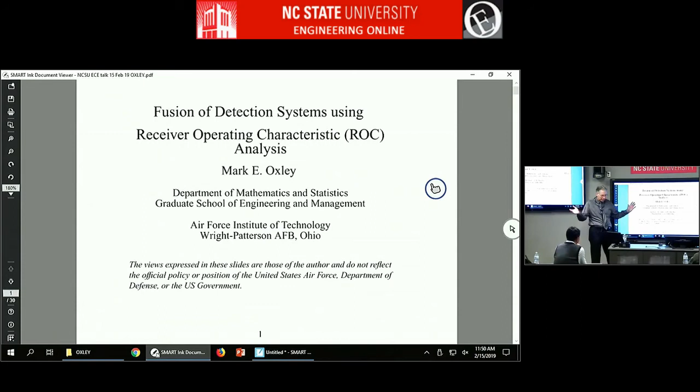So anyway, all right. So if I remember right, I just press the down button. Yeah. By the way, I point out this statement here. I don't represent the government, but they pay me anyway, so I guess.

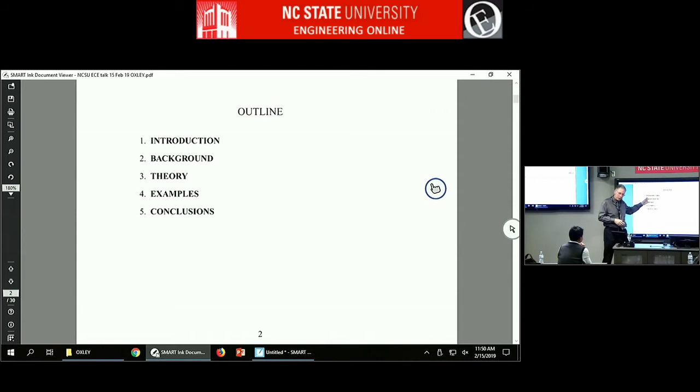So my outline, I'm going to try to do this. One of the things you learn in the Air Force is how you're supposed to give talks. You know, you're supposed to tell them what you're going to tell them, and then tell them, and then you're supposed to tell them what you just told them. I think I'm just going to do the first two. This is what I'm going to try to tell you, then I'll tell you. So to start out with some introduction.

So what's the motivation for this research? So the Air Force has a lot of legacy systems, detection systems. Not only does the Air Force have detection systems, but you're seeing detectors all around cities and things like that. So improving the detections of those detection systems is one of the things we want to do. But since I work for the Air Force, I'm focused on Air Force problems. And so we have a lot of legacy detection systems. So, okay, some improvements have come, so we should try to make that detector better.

So what are the things we can do to make the detection system better? Well, we could upgrade the sensor. Maybe the sensor has more pixels or whatever the sensor is. We could go in and change the algorithm because maybe there's a better algorithm. Maybe we can insert another sensor alongside the original sensor. So now we've got two sensors. Maybe the second sensor is a little bit different. Maybe it has a different modality. Or maybe we can just insert a whole new component along with the original components. Maybe that would get better performance. So that's one of the things we can do with legacy systems.

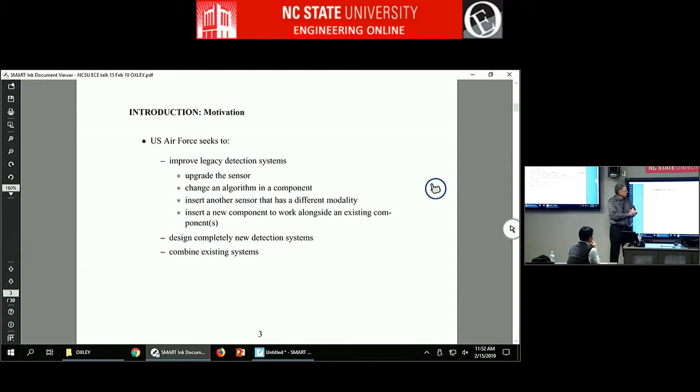Or maybe we'll just scrap it and start all over with a whole new design. Or maybe we can just take the legacy system as it is and take a new design and then combine them. So there's a bunch of options here. Okay, so, but making these changes to existing systems and not knowing, if I combine something or pull out an algorithm and stick in a new algorithm I think is better, it'd be nice to know what the end result is. Doing all that actually costs a lot of time and money.

If you want to put a new sensor on an aircraft and then fly it, you've got to make it, test it, you've got to do all these things. You've got to design it, especially if you're going to combine it with another one. And there may be a bunch of different ways that you can combine it. You've got to build this new combined system. You've got to test it. You've got to maybe take it out to Edwards Air Force Base, put it on an aircraft, fly it, test it. That's going to be very expensive.

Plus you've got to wait in line to get some test pilot in an aircraft to fly it on, and it's going to be very expensive. And then you've got to perform a verification and validation on the system. Maybe you do that before you even test it, but you get test data now, you're going to try to verify it. And then you've got to determine the performance of the new combined system.

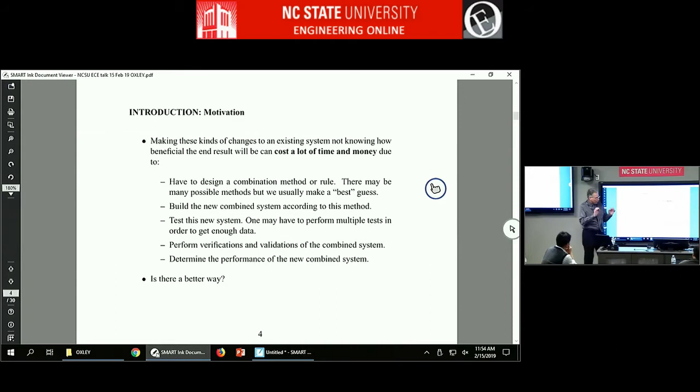It would be nice to know, if you're going to combine this, whether it's going to be any better than the initial ones you got. So if I knew that it wasn't going to be that much better, I wouldn't do all this. Okay. But if I knew, after doing this, that it's going to be much better than what we've got, then we would go through all that time and cost, because we have an idea that it's going to be better. Okay?

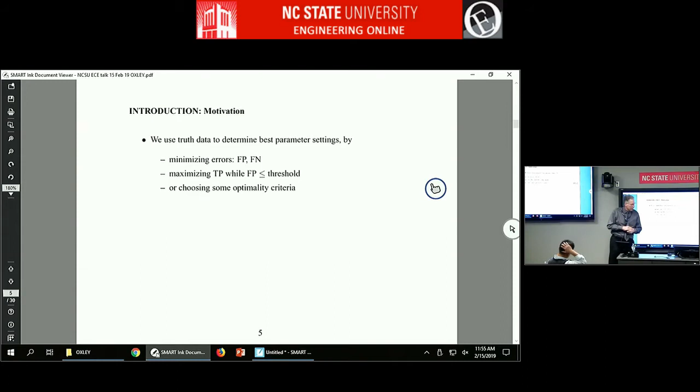So one of the terms relates to how you quantify the performance. Well, we'd hope that we would have very small false positives and very small false negatives. So one of the things we would like to do is maximize the true positives while we minimize the false positives. Or maybe there's some other optimality criteria you would like to use. Lightweight would be important, but that doesn't tell you that the detection system is better. Maybe it's cheap, so that doesn't tell you if the performance is better, but that still is a criteria.

So what's my big idea here? If you have a system, you would probably have the ROC curve, or at least an approximation. Actually, no one has the ROC curve of a system, because the ROC curve assumes that you have all the information and everything is running smoothly. So really, you need to know what a ROC curve is. A ROC curve is a receiver operating characteristic curve. Let me use this pen here and see if I can write on it. PD versus PF. Yes.

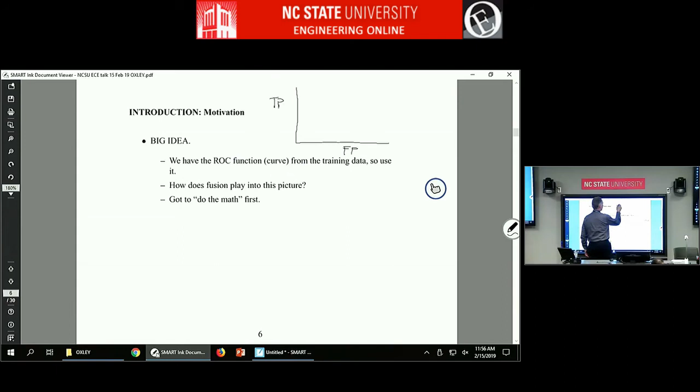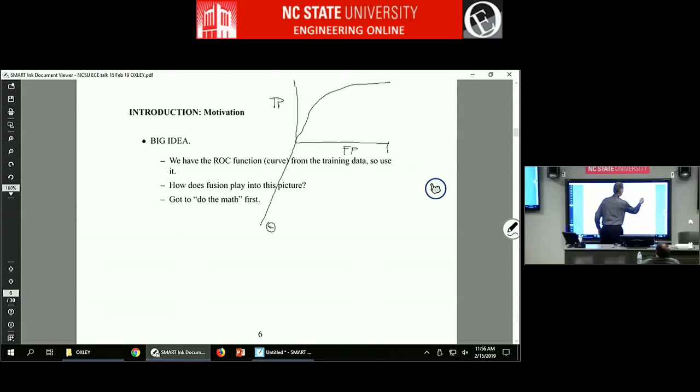This is the false positive. Here's the true positive. And as you change parameters, you can get some curve here. This is 1. Since a true positive is a probability, false positive goes from 0 to 1. So this would be a curve if you looked at every possible parameter. Right now it looks like it's just one-dimensional, but in a few minutes we're going to talk about higher dimensional versions of that. This would give me an idea of how good the system performs as you change parameters.

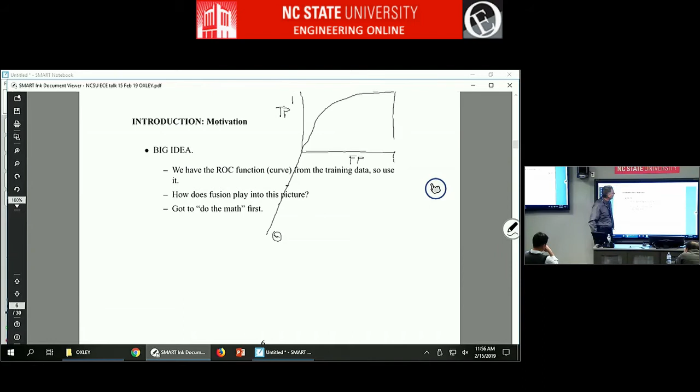This would be the point right here. I'd like to get to this because this corresponds to 0 false positives. The false positive is: I think that's an enemy plane, so I'm going to shoot it down. Turns out, no, it's one of ours. We just shot down our own. This could be fratricide.

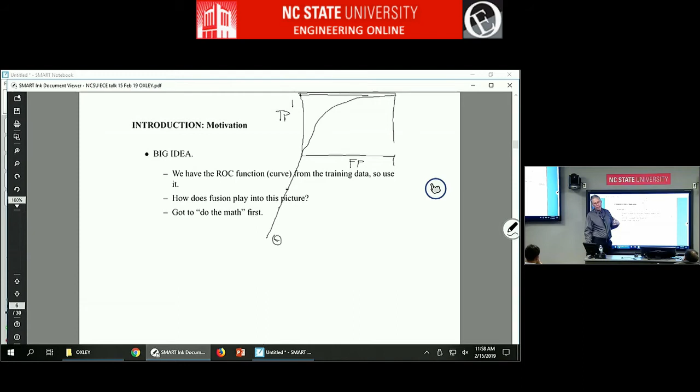I consulted with a company that was working on mammography, so they were looking at breast cancer. A false positive would be telling the woman, we think you've got cancer, come back in a month, we'll stick you with a needle, take a biopsy, and it'll hurt. Meanwhile, you're thinking you've got cancer, and we're going to charge you too. But the other version is the false negative, where we say, no, you don't have cancer, and 2 years later she comes back with breast cancer because you missed it. Now, which, a false positive or a false negative, are you going to live with?

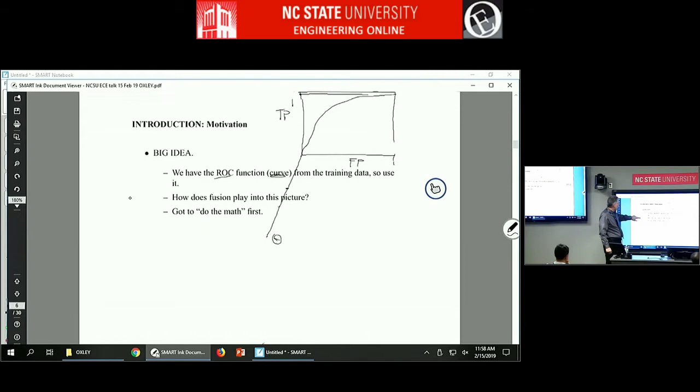So anyway, that has to do with the receiver operating characteristic, or this detection. This is a curve, that's why I've underlined curve. So we'll collect data and try to produce this receiver operating characteristic curve to find out how good the system is. So my idea is, if you've got a legacy system, you already have the ROC curve. Maybe you have this other legacy system with its ROC curve, and somebody has a great idea: let's combine them. Is it going to be any better?

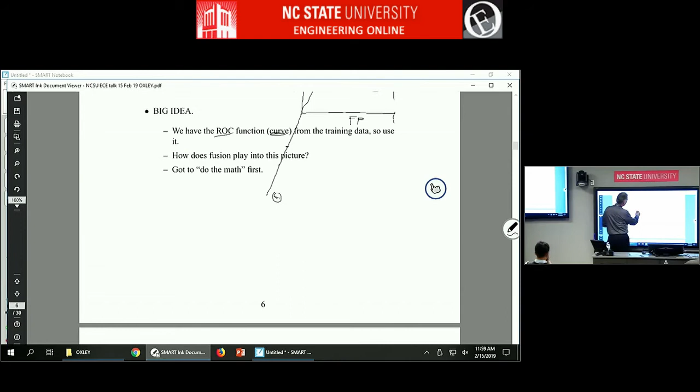So before we do all that, build it and test it and all that money, maybe we could just play with the ROC curves and figure out if it's going to be any good or not. Okay? So I got to do the math on this. Oops, wait a second. Arrow down. Okay, let's see, is that right?

Yeah, so the idea is to combine these systems. And so the buzzword fusion comes up a lot. So let me give you my definition of fusion. Fusion actually came out of a bunch of electrical engineers and computer scientists back in the mid-'80s, I think. So I got a colleague that refers to them as the fusion mafia, so they seem to have control of the definition. My definition is combining objects for better results.

Now I got these numbered here. So what are the objects I'm trying to combine? Detection systems. So if I combine two detection systems, D will just denote a detection system. Script D will be the collection of them. And so those are the objects I want to combine. See, number 2 is results. So I've got some function that tells me how good this detection system is. And so this is going to be some real number.

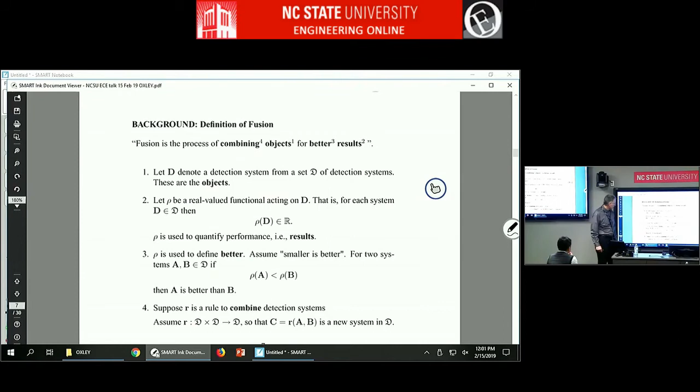So this function should be able to take any detection system in and tell me if it's good or not. I'll give you an example later. So the rho function quantifies the performance, which is the results. How good is it? Number 3 is the better. What do I mean by better? Well, I need the performance functional to tell me what's better. So this can go up.

Okay. The minute you touch it with your finger, it starts misbehaving. Oh, really? You either touch it with a pen, or just use those arrows. So I can move it down? No. But if you want to move it down, it's better to use just those arrows. Maybe it'll fix when I press the arrow down next. You may have to put the pen down. It may think your finger is the pen. Say again? You may have to put the pen back in the tray, because it may think you're at the bottom. Yeah. Okay. All right. Pen. All right.

So if I got one detection system A, another detection system B, and I want to quantify how good A is and how good B is, and let's just suppose that a smaller number is better, then this would say that A is better than B. So you got to have a way of quantifying better, however you define better.

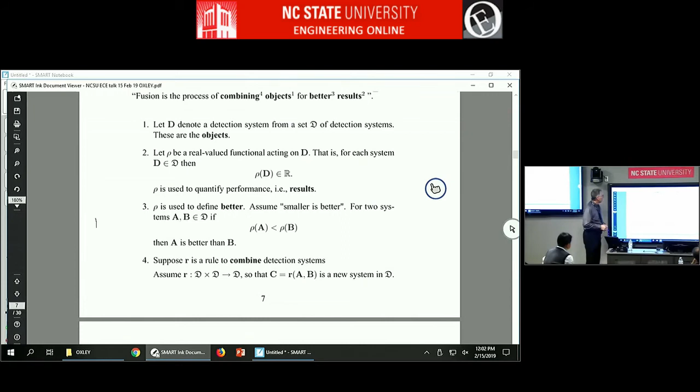4 is combining. So suppose we have some rule of combining 2 detection systems, and that makes a new detection system C. So combining objects, how do you combine? You need to have some rule. I think I hit them all. Let's see, go to the next slide maybe. Yeah, so the last one was number 4, yeah, it's combined.

So after I combine them, this is a new system, detection system C. Rho tells me how good it is. Is it better? What do I mean by better? Well, it's got to be better than A, it's got to be better than B. Remembering that smaller is better, I want this number to be smaller than either of these two. Notice it's less than and not less than or equal, because if this equals performance of A, then I might as well stick with A. Why make a new one?

Okay, so combining systems yields better results than the two individual systems. And so if I'm going to combine this using this rule, and if this is true, then I would say I have fused A and B, and I would call this rule R a fusor. Okay.

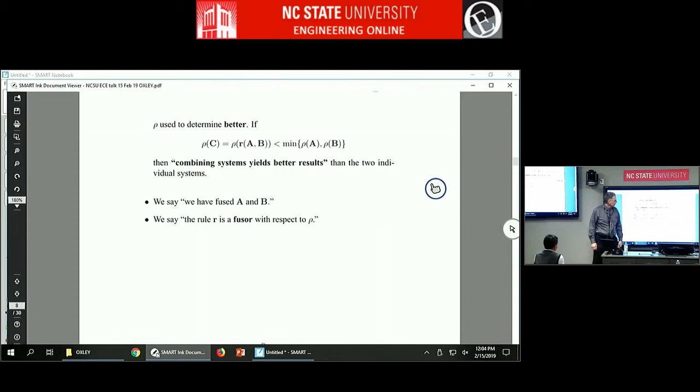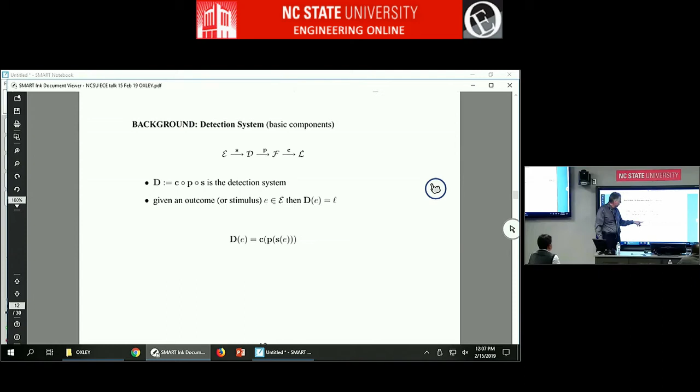Typically, the classifier has some parameters in it. How many parameters? I had a conversation with you about deep learning and all that. Well, you have a lot of parameters in there. So this is a vector, and theta is just a set of the parameters. So you could actually change the classifier around. And so now the detection system depends upon the parameter. So for every choice of the parameter, I actually get a set of detection systems. Instead of calling it a set, I'm just going to call it a family, and I'll use a different font to denote the family. Okay, so this is a single detection system family.

Okay. Similarly, the processor probably has a lot of parameters in it. So this could be a vector of parameters. So now I got two parameters here, one on the classifier, one on the processor. So this would make another kind of detection system family. And this is a single family, but it's a little bit different than the previous one. So D2 is not D.

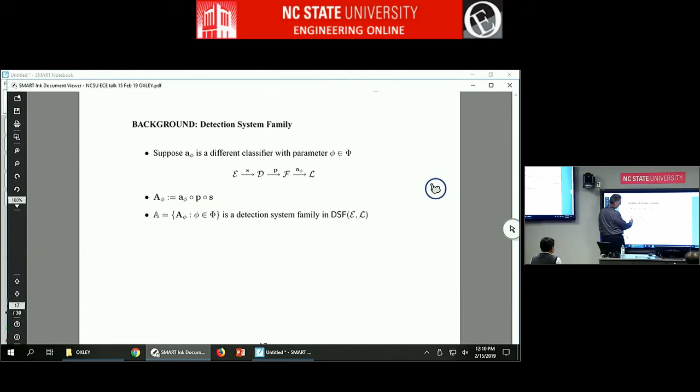So that was just all the different possible ways you could have a detection system with a parameter. I think I'm just going to use one symbol for one system. But suppose I have a different classifier. Let's just suppose I change one. Maybe it's the same sensor and processor. Is this a different detection system? Actually, with that parameter there, it's different. Is it a different detection system family? Yes. So I'll just define capital A with this parameter to be a different family.

Okay, so here's the original one, and here's the new one. I'm going to take the outputs and do a concatenation. So here's the set: target, non-target, target, non-target. I'm looking for a rule that's going to take those and produce either a target or non-target. Well, for detection systems, you've only got the AND rule or the OR rule.

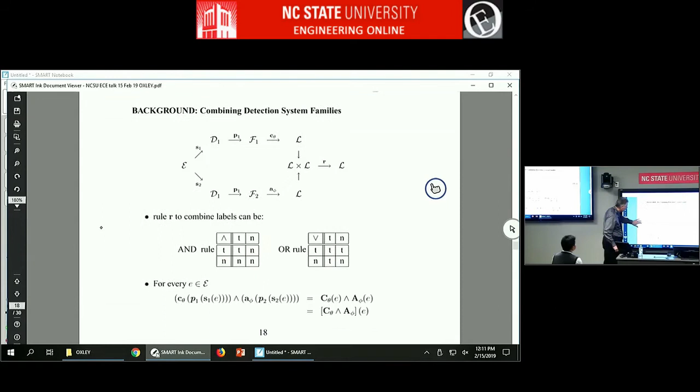So let's see, I need to scroll this up a little. So how do I combine detection systems? I'm just going to combine the outputs. See, the input's the same, so from here all the way over to here will be a new detection system. So with two families, I can make a new family.

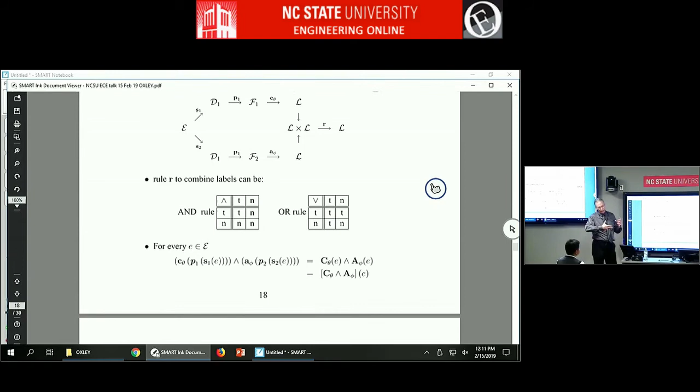Okay? Well, actually, this statement is with theta and phi fixed. I got two detection systems. I combine them. I make a new detection system. But as I go through every possible theta and phi, I actually make two families. So here's an operation I can perform on two families to make a new family by ANDing or possibly ORing the two systems.

Now the question might be, well, which one's better? So I can make a new detection system. Sorry, I should use that. All right, so that's just a quick background on combining detection systems just by combining the outputs.

By the way, while I'm talking about it, I could just cut out the classifiers and take the feature vectors and combine those and then pass it to another classifier, so that would have a feature rule, and that would be a new family. I could take the output of the raw data, combine those, and then pass it through some processor and some classifier, and that would be another one.

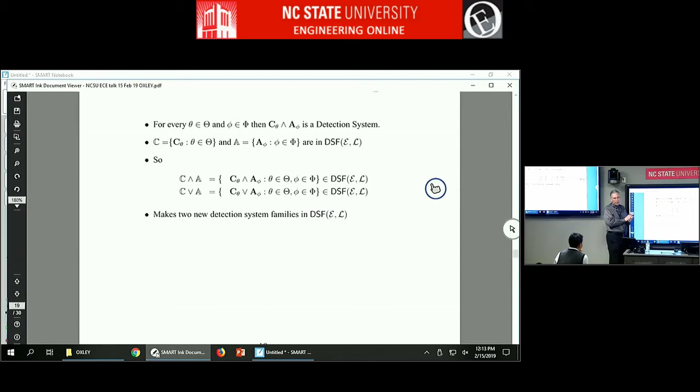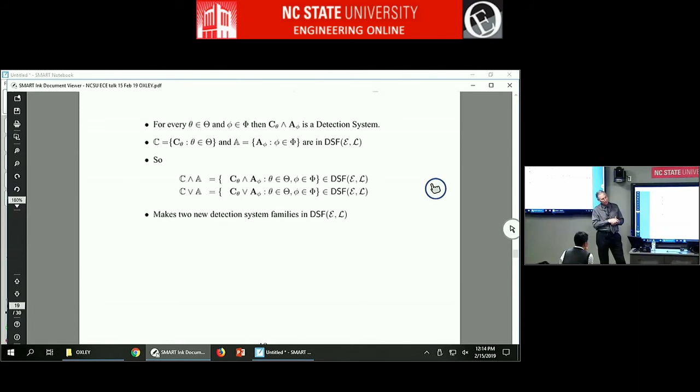Hopefully, especially for a pilot in a dogfight, he's going to make the decision. Also for mammography, you hope that the radiologist is going to make a decision versus the machine saying, yeah, we're going to biopsy you. So actually, in medicine, I think the standing rule is you got to have somebody to sue if something goes wrong, right? So you got to have a person in the loop, okay? I know that sounds kind of bad, but I think it's really true.

Okay, so now I want to talk about the receiver operating characteristic function. I mentioned the truth, but we don't have the truth. That's why we're making these systems, right? Sensor, processor, classifier. We're trying to figure out if this thing really is a target of interest or it's not a target. So we're doing this to come up with the truth mapping. So we don't have the truth mapping, but I can talk about it.

So I'm going to go at the far end now. If you gave me a target, what are all the events, or all the stimuli, that actually map to that label target? What are all the events over here that are not targets? So this is the pre-image of targets. It's just all the events that truth maps to a target. So I've just subscripted all the events sub T for targets, all the events N for non-targets.

So if we have a probability space, here's your event set, here's the sigma algebra, and then we choose some probability measure. You could choose any probability measure as long as it's defined on that sigma algebra. So from that, we can talk about the probability of true positive for this detection system for fixed theta. It's a conditional probability, just writing it out. And then we can talk about the probability of false positive for this detection system for that theta. Very similar to the true positive.

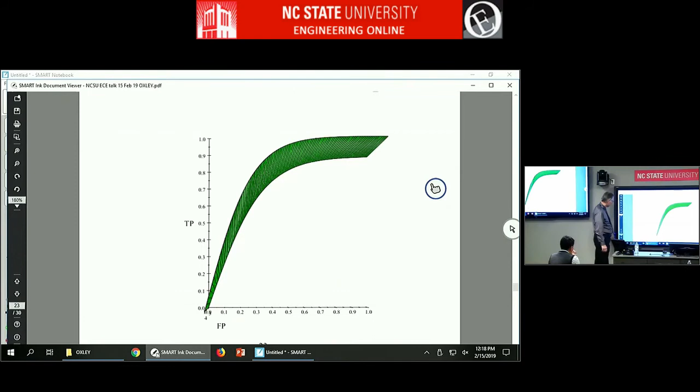So what are some rules? Okay, so back to my big idea. I want to combine ROC. I got two systems, A and B, and I want to AND them. So I got to build it and all that and test it. But what are the ROC curves? Can I combine the ROC functions for A and B? So if you gave me the ROC function for A, give me the ROC function for B, can you tell me what the ROC function for A and with B is? Well, I get pretty close.

So here's the theorem that was done, I don't know, a decade ago. If you had two detection system families, and these systems are looking for the same thing, okay, and these systems are statistically independent. Now that's going to be hard to swallow. But let's suppose I live in this magical world where maybe everything holds true.

This formula pops up. So it's the product of the ROC function for A times ROC function for B, but P and Q are different. And notice that the parameters go away. So I don't need to know the internal workings of the system. I just need to know the individual ROC functions, and this would give you the ROC function ANDed. Similarly, there's one for the OR. Again, we're assuming independence. So we don't know if they're dependent or not, but this could give us maybe an idea if it's going to be better or not.

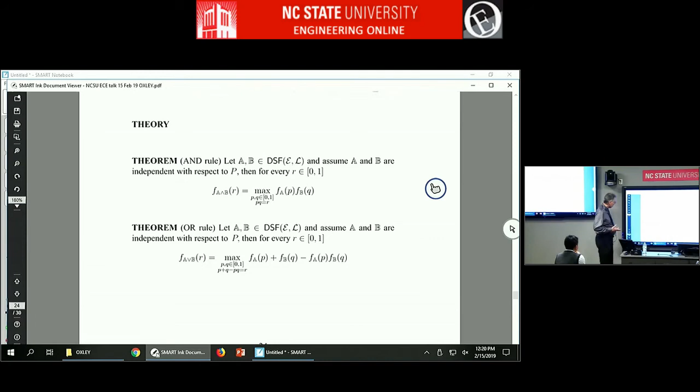Okay, so let me give an example here. Suppose I have 3 systems. I was going to do 2, but there's only 2 curves, okay? Let's make it really interesting. I'm just going to make one up. So p to the 4th, hyperbolic tangent. This will be blue. Here's some other ones that we made up. And let's plot them. Oops. Wait, what happened to the plot? There's the plot.

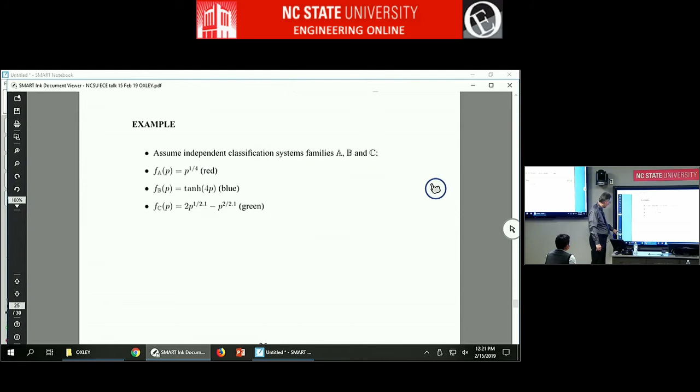I chose these because the red one crosses the blue one, so it's kind of hard to figure out which one's better. Well, again, you have to choose the performance, and then you can talk about which one's better. What about the green one? The green one's below, but here it's better than the other 2. So you got 3 of them, they all cross. If one dominated the other, you would say, oh, let's take that one. We know that's going to be better because the true positives are higher.

Okay, but let's see. If you gave me three systems, I could look at the individual ones and just see how good they are. I have the ROC functions for each of those. But I'd like to know what happens for A and B. Let's forget C. Well, what about A and C? What about B and C? This is ANDing. What about if I OR them? Okay, so here's 6 systems that I'd be interested in looking at.

But what about if I take all 3 of them? Suppose I AND them all. A ANDed with B, ANDed with C. What about if A ANDed with B, ORed with A? Well, that's different. I don't think that's a typo. A ANDed with C. What are all the different combinations with ANDing and ORing?

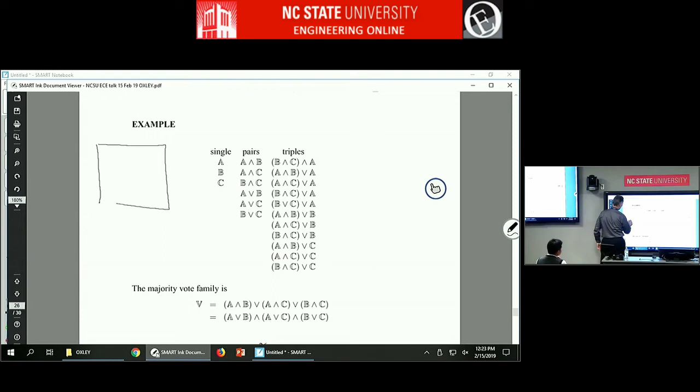So if you had A, B, and C, let's see, majority vote would be if any two of the three said it's a target, then you'd go with target. So A and B says a target. A and C says it's a target. B and C says it's a target.

Okay? So that's just B says it's a target, and the other guy said no. So this is, from a Venn diagram, what the majority vote looks like if you did it with sets. So here it is for systems. A AND with B, A AND with C, B AND with C, and then I take the OR. But there's really only one majority vote, but you can write it this way or that way.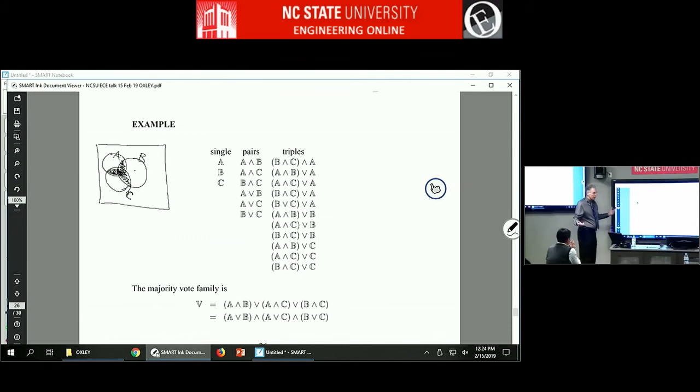But let's use the formulas for ANDing B and C, and then AND it with A. I can make the ROC functions. I can make the ROC curves, okay? So there they are. It's easy to plot with a student who knows how to code MATLAB. So I can look at this and figure out, well, which one's the best?

Well, you can still see the red, which is A, here's blue, and then there's C. But all the other black ones are all the other ones. We highlighted this one because that one really sticks out, and it's close to this point, which is good because you'd like the true positive to be 1 and the false positive to be 0. So, yeah, that looks good, but it depends upon your criteria.

Okay, so let's see. Wait a second. I think I got it back in order. Let me zoom in. Okay. In particular, let's look down here. If, for example, you couldn't live with a false positive past, say, 0.05, okay? Then you wouldn't be interested in this. Yeah, it's way up there, but I can't live with a false positive.

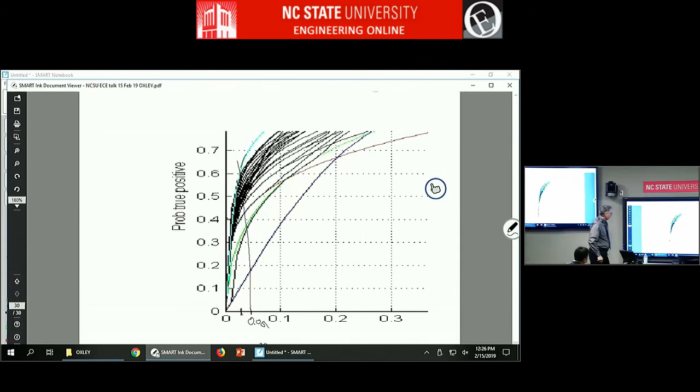Notice that the majority vote is actually not as good as something else over here. I'm not sure which one it is, but the black actually is higher for a smaller false positive. So even though the majority vote looks like it's better, it comes down to what's your criteria of goodness, of better. So let's see. Go back to this. I think okay. So I talked about better.

Let me give you an example of what better might be. Yeah, so which one is better? So Bayes cost is an example that comes up in statistics. Let me put this back. In probability. So let's suppose you're going to quantify the cost of a false positive. It depends upon the application, right? Would it be breast cancer? Okay, it's just a biopsy, but we will know for sure.

Pilot in a war fight, a false positive may be really bad because you're shooting your own. That's fratricide. That's not good. So maybe you can choose this number, the cost of a false negative; you can choose those numbers. You could probably normalize them so that they sum up to 1. But we're going to take those and multiply them by the false positive for system A, for that fixed theta. Here's the false negative for that system times that. So basically, the cost is you're going to weight it.

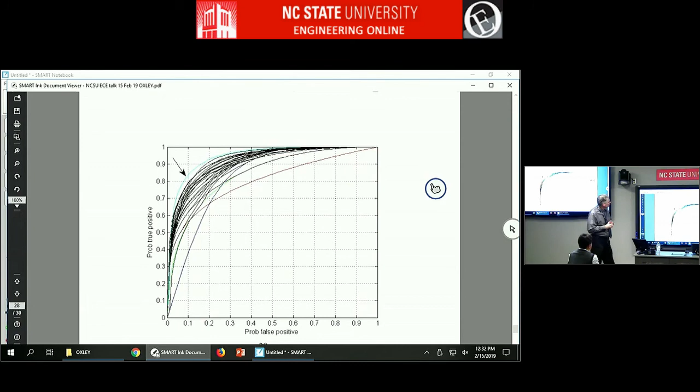which is not necessarily the case. But we have some other techniques to determine if the systems really are dependent. I got some work on that if you're interested in hearing about that. So again, the big idea is I got this information. Can I use it to tell me how to combine over here? Because as you can see here, there's almost 20 different ways to combine. Which one's the best? If each one took $1 million to test, it would be good to just do it once.

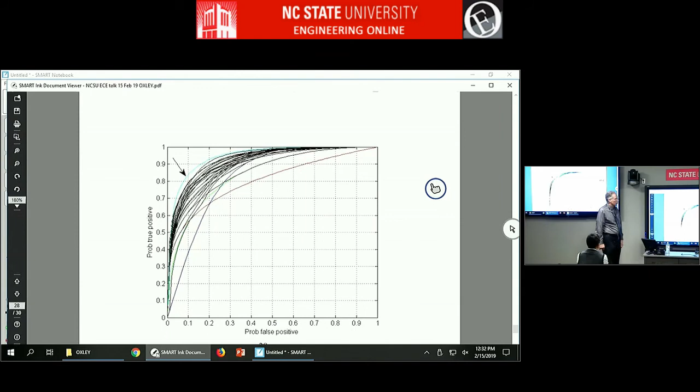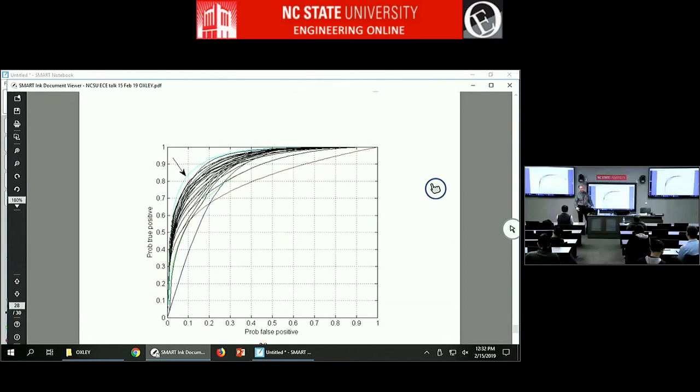First of all, thank you for your talk. It was very interesting. I have a question related to the application of your approach. You made an example with 3 different sensors, but assume that you have something like 100 sensors. It can happen. You can have cheap sensors, use many of them, and then use the information.

Then if you really want to do this, you have to go through 2 to the power of 100 different ways of combining them and then choose the best one, which is not really practical. So have you thought about any algorithmic way to search the space of all possible combinations through the rule that you came up with? No, but so if you got N systems, how many systems will you come up with if you do all possible ANDs and ORs?

Well, I got a paper that says it forms a Boolean algebra of ROC functions. Turns out that's not really correct because the absorption property doesn't hold. We messed up, which was bad, but in the process I found out that there are some families of detection systems where you could reach in and grab one parameter, grab another parameter within the same family, and then AND them or OR them, and you could get better results.